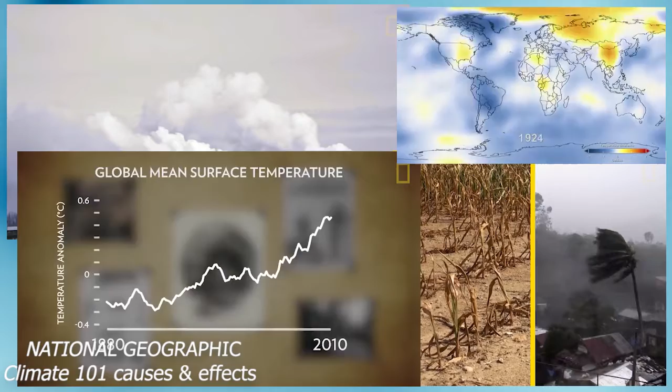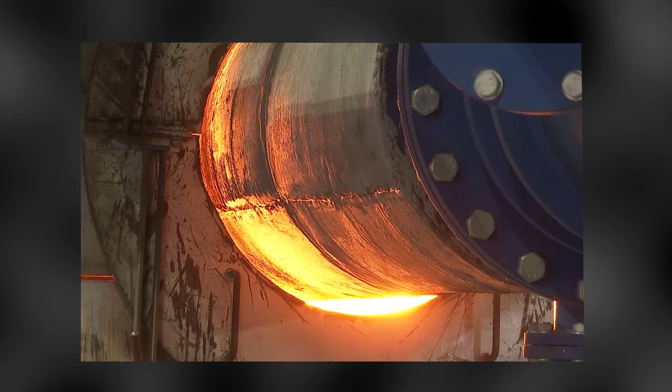The concentration of carbon dioxide increased by 0.3% per year, and concentration in the atmosphere is 30% higher than before the Industrial Revolution. One of the primary sources of carbon dioxide emission in the atmosphere is the production of cement. Therefore, reducing its production energy intensity and reducing the number of harmful emissions is becoming increasingly important.

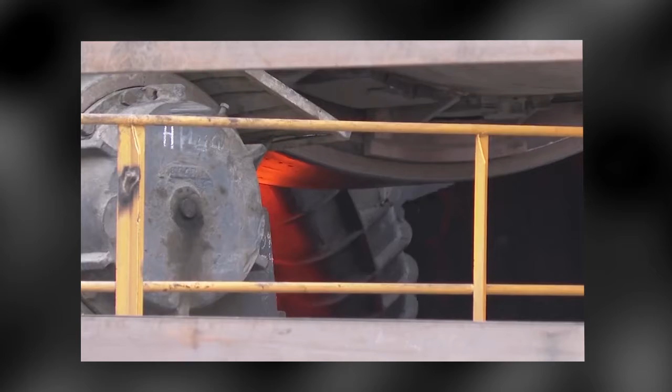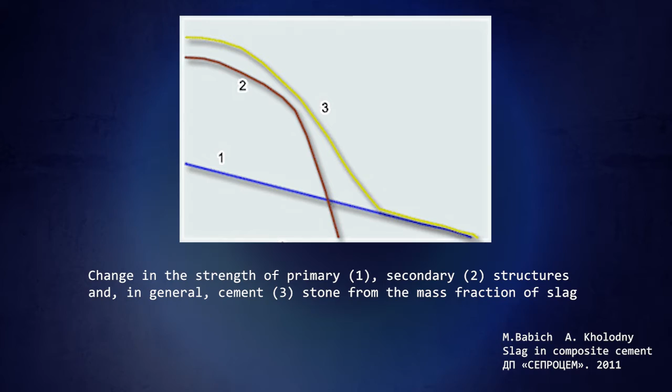One way to reduce cement production emissions is to introduce production waste into their composition, including granulated blast furnace slags. The introduction of slags makes it possible to combine a decrease in the proportion of clinker in cement with production waste disposal, however, introduction of mineral additives as a rule leads to a decrease of cement activity.

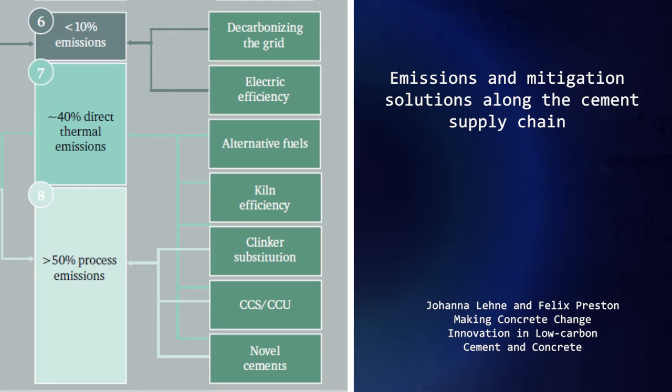A further increase in active mineral additives share of production waste is achieved through various cement activation methods. One of these methods is the impact on the hardening binder with magnetic fields.

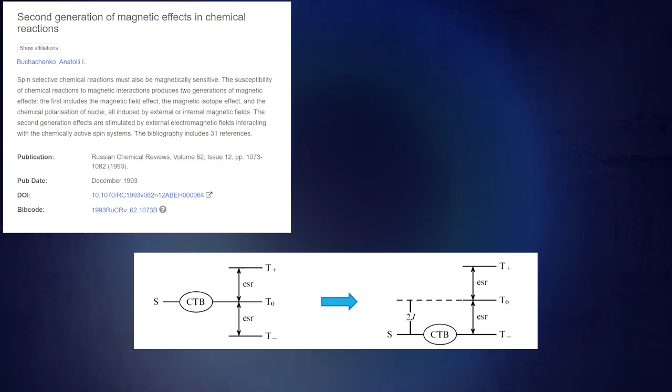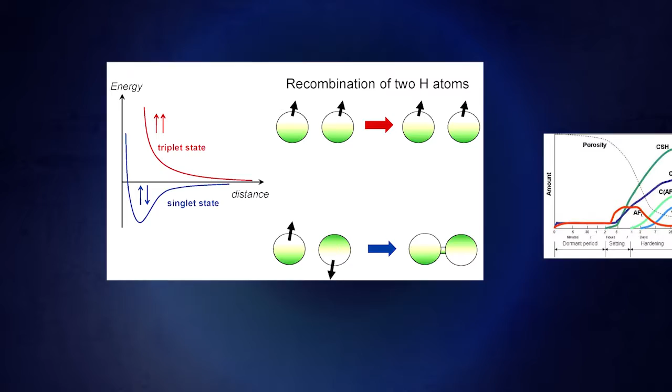Professor Buchachenko showed that magnetic fields significantly affect the spin dynamics and control the spin multiplicity of radical pairs. Researchers Lapsik, Simic, Afanasyev, Tsira, Anger, Andreeva, and Alexandrova determined that cement is a paramagnetic substance and that cement hardening occurred due to the recombination of paramagnetic centers. Thus, the possibility of the influence of magnetic fields on the binder's hydration process has been proved.

Our work, application of sintering dust for the increase of cement durability, was proposed to use finely dispersed magnetized ferromagnetic additives to activate blast furnace cement. As such an additive, we have used fine dust, waste from the metallurgical industry.

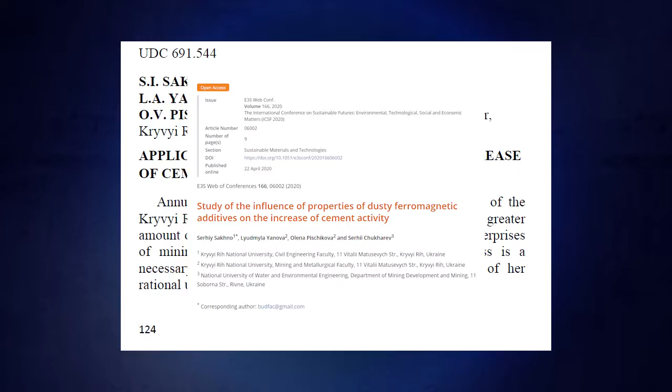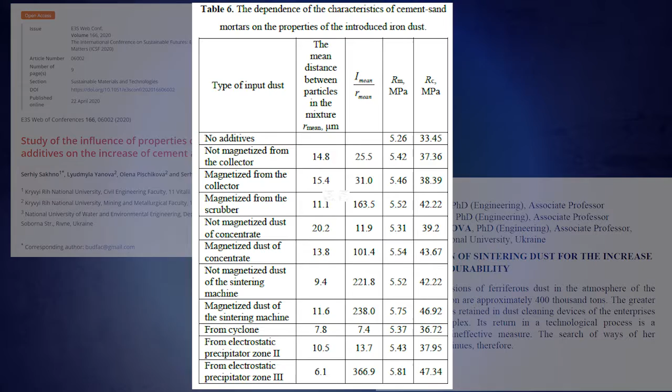In the research study of the influence of properties of dusty ferromagnetic additives on the increase of cement activity, the additive's magnetic and dispersed properties on the activation effect were studied. Obtained dependencies of cement strength on magnetization and particle dispersity and the additive's small portion, up to 2%, led to the conclusion that the activation effect is not due to the filler or pozzolanic effect, but due to the effect of magnetic fields.

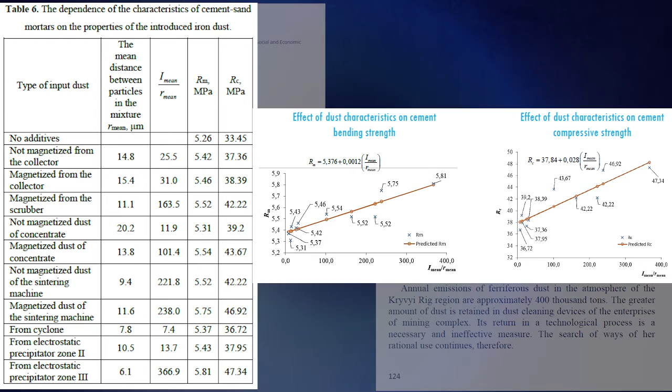Still, the impact of long-term magnetic fields on the process of cement hydration wasn't considered yet. Therefore, this research set the task to study the changes in cement hydration and structure formation process that appear under long-term magnetic impacts. Studies of the hydration products of ordinary and modified by additive blast furnace cement were carried out

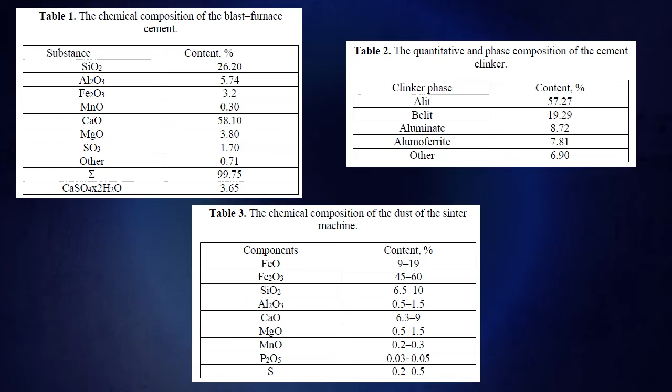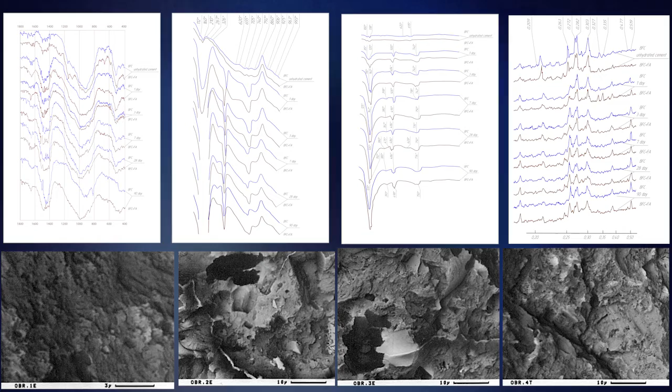to study the processes of hydration and structure formation of cement with pre-magnetized ferromagnetic dust. The research was carried out by analyzing the binder's hydration product by infrared spectrometry, thermogravimetry, X-ray phase analysis, and electron microscopy. We have studied the original astringent and hydrated samples at 1, 3, 7, 28, and 90 days.

Dust of electrostatic precipitators of the sinter production was used as an additive. The additive was introduced in the amount of 2% of the weight of cement. The data obtained from the research made it possible to carry out a quantitative analysis of the kinetics of hydration of the main components of binders and identify the factors affecting structure formation process.

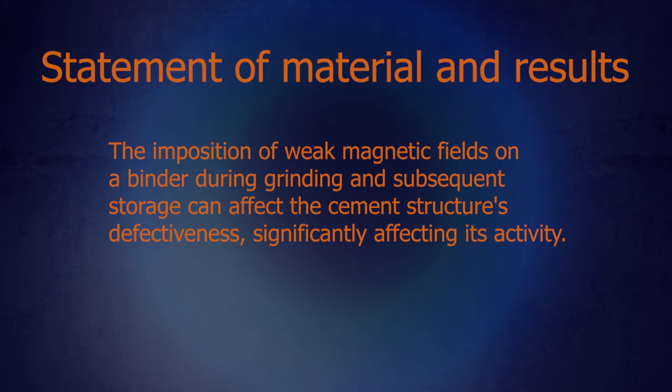The imposition of weak magnetic fields on a binder during grinding and subsequent storage can affect the cement structure defectiveness, significantly affecting its activity. In the early stages, the dynamics of the formation of calcium aluminates significantly affects structure formation.

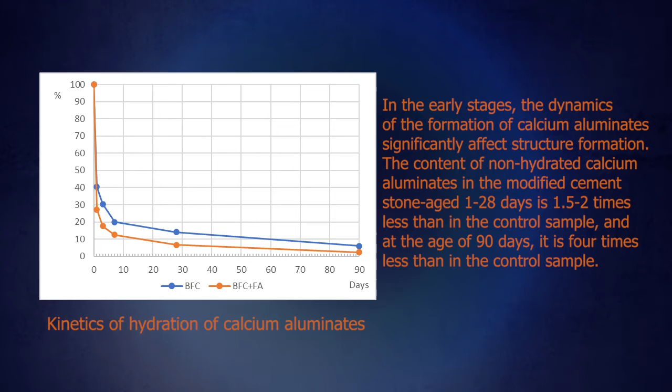The content of non-hydrated calcium aluminates in the modified cement stone aged 1 to 28 days is 1.5 to 2 times less than in the controlled sample, and at the age of 90 days, it is 4 times less than in the controlled sample. The research data indicate the intensive formation of ettringite under the influence of ferromagnetic additive up to 1 day, and deceleration of this process in subsequent periods.

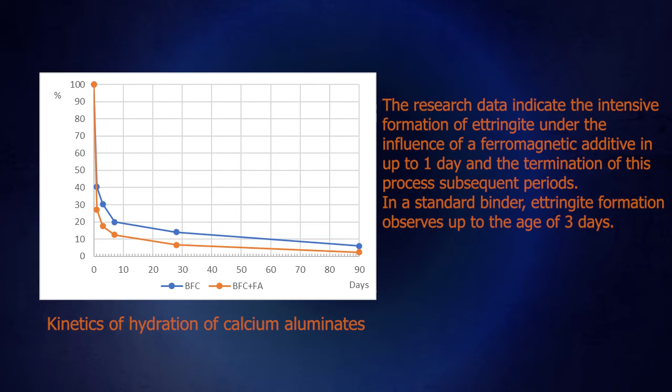In a standard binder, ettringite formation is observed up to the age of 3 days. The observed dynamics of the formation of calcium hydroaluminates and calcium hydrosulfate aluminates allow us to conclude that under the influence of the additive's magnetic fields, construction of the gel-ettringite frameworks occurs faster and is completed within 1 day.

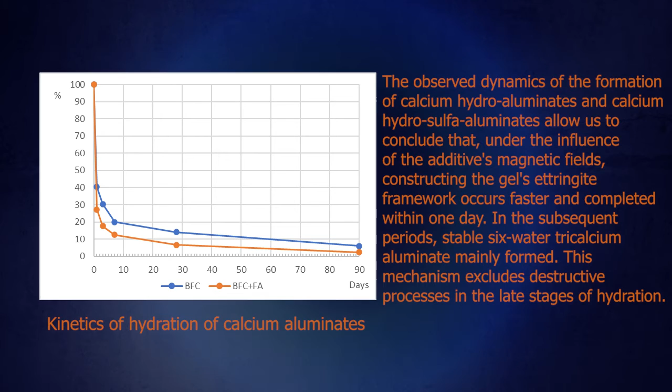In the subsequent periods, stable 6-water tricalcium aluminate mainly formed. This mechanism excludes destructive processes in the late stages of hydration.

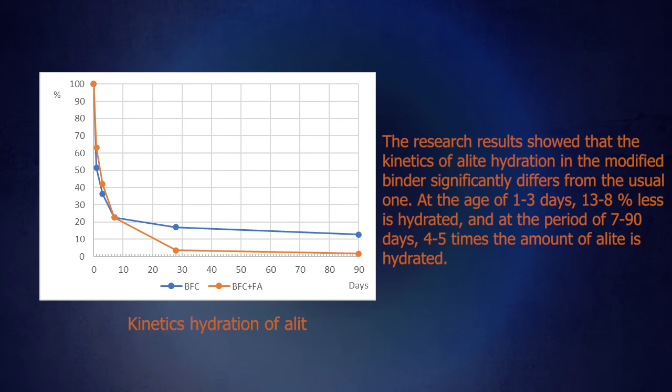The research results showed that the kinetics of alite hydration in the modified binders significantly differs from the usual one. At the age of 1 to 3 days, 13 to 8% less is hydrated, and at the period of 7 to 90 days, 4 to 5 times the amount of alite is hydrated.

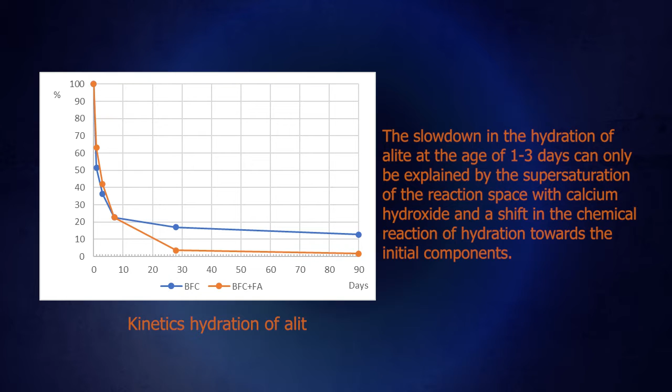The slowdown in hydration of alite at the age of 1 to 3 days can only be explained by supersaturation of the reaction space with calcium hydroxide and a shift in the chemical reaction of hydration toward the initial components. The intensive hydration of alite causes an increase in calcium hydroxide in the period up to the first day. The magnetic fields induced by the ferromagnetic additive cannot influence the diffusion rate of the reaction products.

Therefore, the diffusion of calcium ions from the reaction zone in the modified binder becomes the limiting factor for alite hydration much faster than usual.

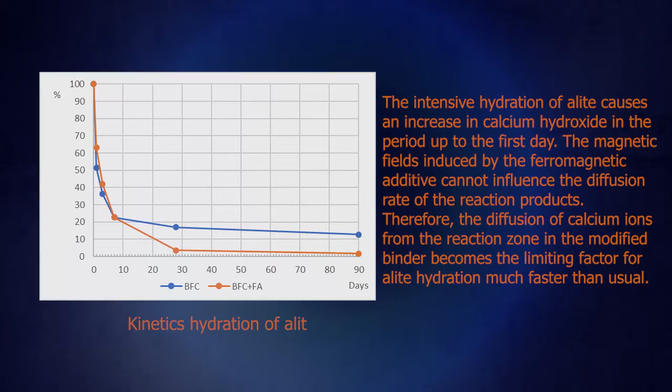Analysis of the results confirmed the accelerated formation of lime in a period of up to 1 day. In the gel made of modified cement, calcium hydroxide content is 20% higher than in control samples during this period.

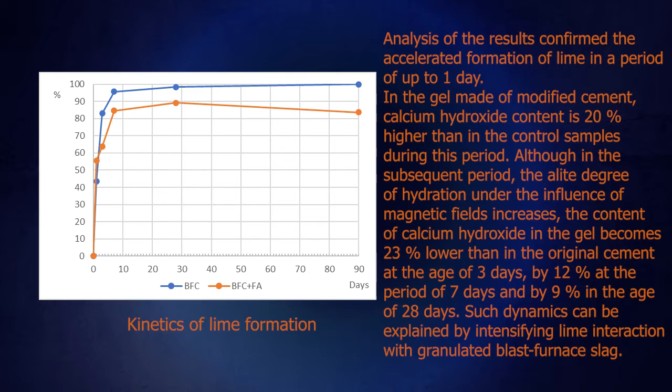Although in the subsequent period, the alite degree of hydration under the influence of magnetic fields increases. The content of calcium hydroxide in the gel becomes 23% lower than in the original cement at the age of 3 days, by 12% at 7 days, and by 9% at 28 days. Such dynamics can be explained by intensifying lime interaction with granulated blast furnace slag.

Analysis of the results confirms that the hydration of granulated blast furnace slag intensified under the action of magnetic fields, induced by a ferromagnetic additive.

There is an increase in slag hydration degree by 20% at 3 days, 23% at 28 days, and 59% at 90 days. In ordinary cement, after 28 days of hydration, the slag content practically doesn't change. In the same period, the content of slag in the modified binder decreases by 30%.

In the period of 28-90 days, the content of alite in the modified binder is insignificant and amounts to 4-2% of the original. Such content of alite doesn't provide the slag hydration with a sufficient amount of calcium hydroxide. The slag's intensive hardening process is due to the binding of previously formed calcium hydroxide reserves. This process reduces the lime content in the modified cement stone at 90 days of age by 65%.

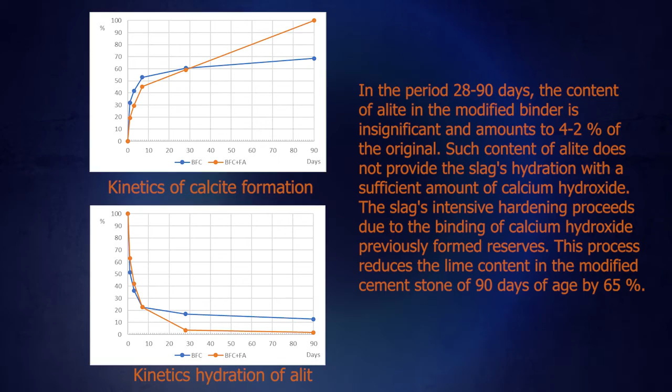The revealed patterns make it possible to explain the greater efficiency of magnetic activation for belite types of cement. A smaller amount of lime released during the hardening of belite makes this process less dependent on diffusion. Therefore, the formation process in belite cement under the influence of magnetic fields should be more stable.

The analysis results show that the ferromagnetic additive has an intensifying effect on the process of belite hydration. The content of non-hydrated belite in the modified binder is less than in control at the age of 1 day by 12%, at 28 days by 10%, and at 90 days by 19%.

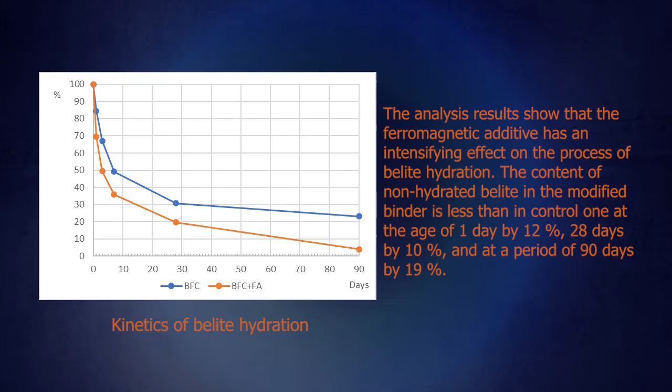Infrared spectrometry data confirm a high degree of silicate hydration at all hardening stages. At the age of 3 days, the original silicates in the modified binder are 1.5 times less, at 28 days by 2.5 times, and at 90 days by 4 times.

The gel's sorption with calcium hydroxide and the slowdown in the hydration of alite explain the non-monotonic changes in silicate hydration rate up to 7 days.

Analysis of the results shows that the ferromagnetic additive, by changing the kinetics of the hydration reaction, contributes to increasing the crystallized tobermorite content in cement stone by 1.3-1.4 times.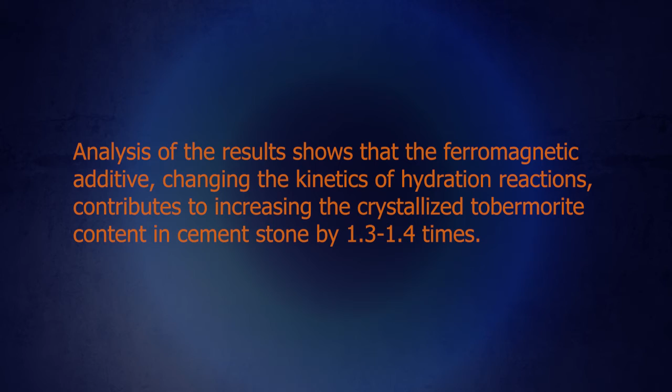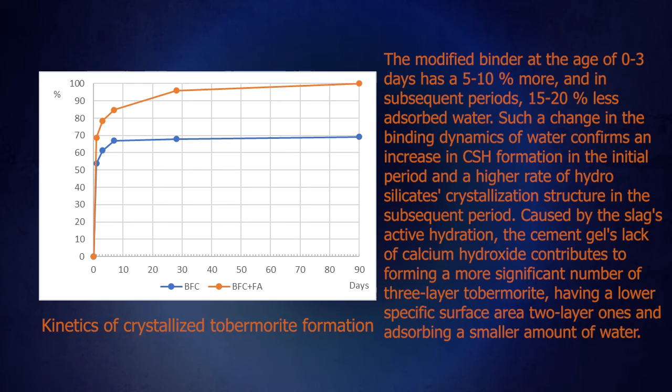The modified binder at the age of 0 to 3 days has 5-10% more, and in subsequent periods 15-20% less, adsorbed water. Such a change in the binding dynamics of water confirms the increase in CSH formation in the initial period and the higher rate of silicate crystallization structure in the subsequent period.

Caused by the slag's active hydration, the cement gel's lack of calcium hydroxide contributes to forming a more significant number of 3-layer tobermorite, having a lower specific area than 2-layer ones and absorbing a smaller amount of water.

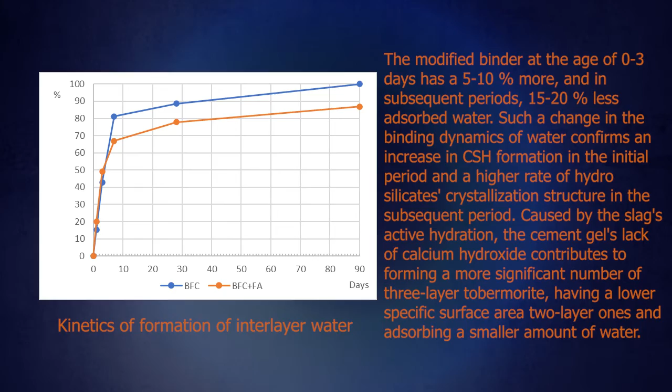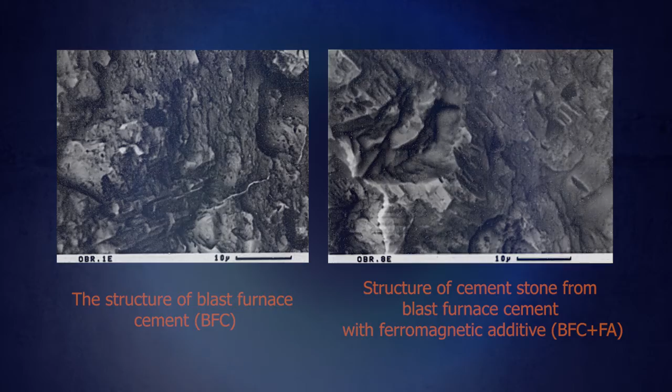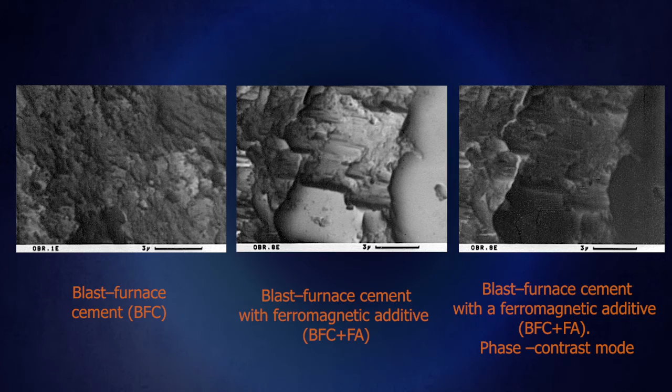The pictures obtained at 8000x magnification confirm a crystalline structure in the modified cement stone and a weakly crystallized, disordered structure in the control cement stone. A high degree of hydration of the modified binder reduced the proportion of evaporated mixing water, reducing the cement stone's overall porosity.

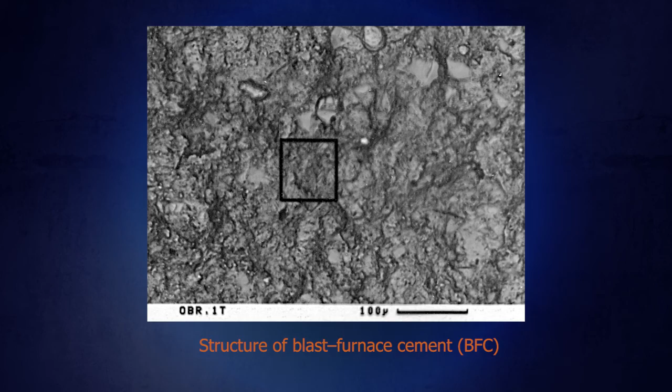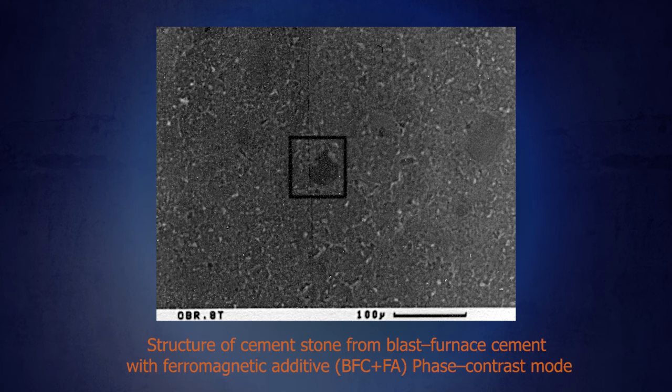The studies show that the introduction of pre-magnetized ferromagnetic dust into blast furnace cement composition has an activating effect on binder hydration. Activation occurs both in the initial and long periods of hardening.

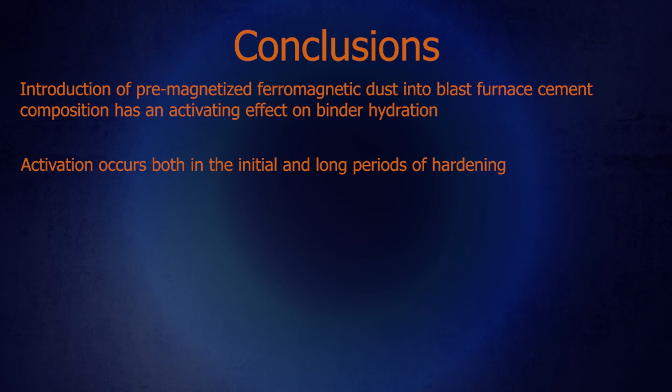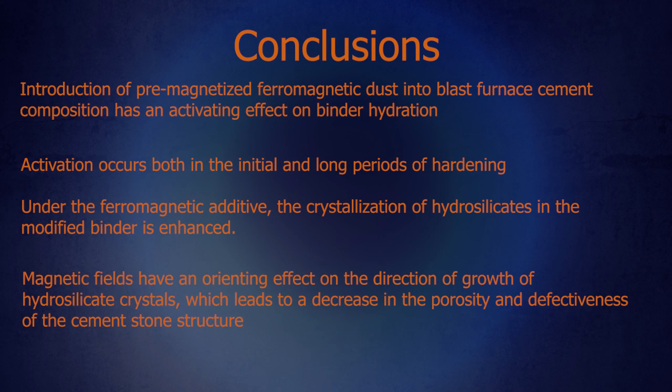Under ferromagnetic additive, the crystallization of hydrosilicates in the modified binder is enhanced. It has been established that magnetic fields have an orienting effect on the direction of growth of hydrosilicate crystals, which leads to a decrease in the porosity and an improvement of the cement stone structure.